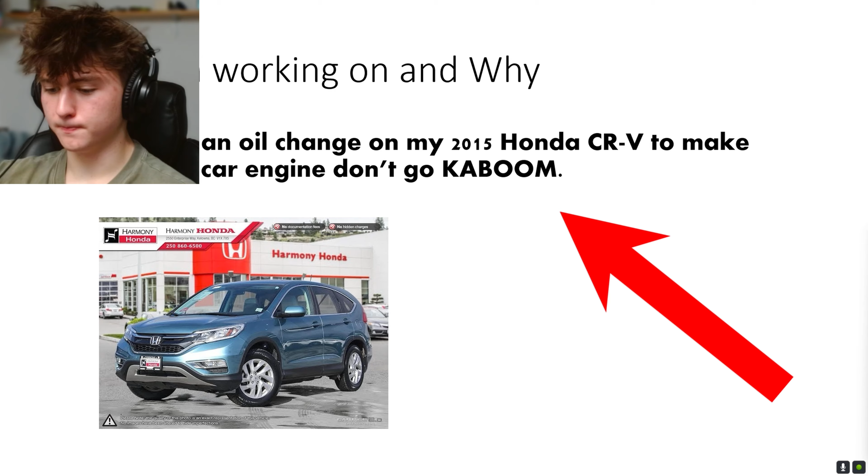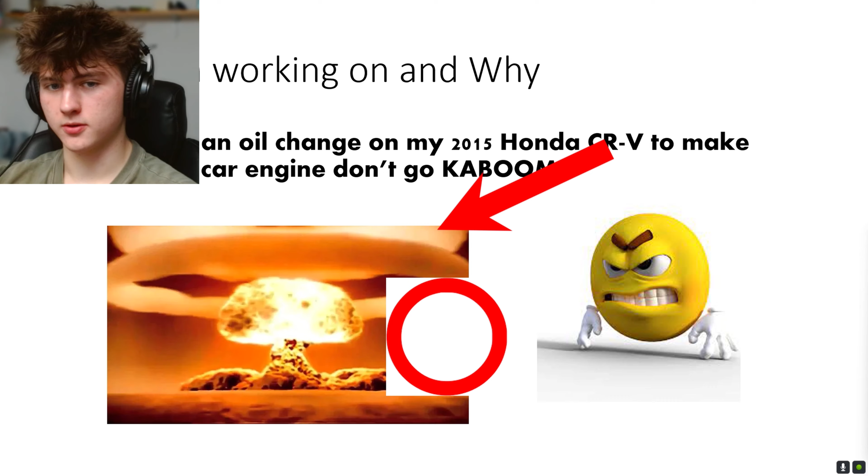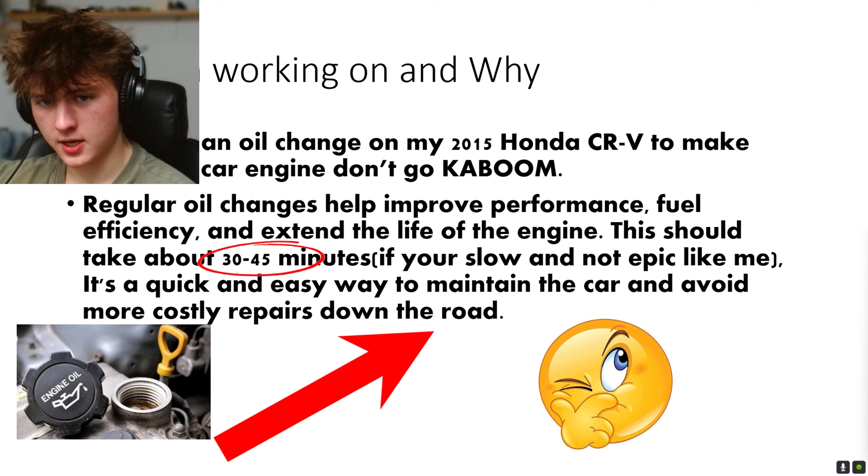Regular oil changes can help improve performance, fuel efficiency, and extend the life of the engine. This should take about 30, you can see 45 minutes if you're slow and not epic like me. It's a quick and easy way to maintain the car and avoid more costly repairs down the road.

Tools? Nah, don't need them. Just kidding.

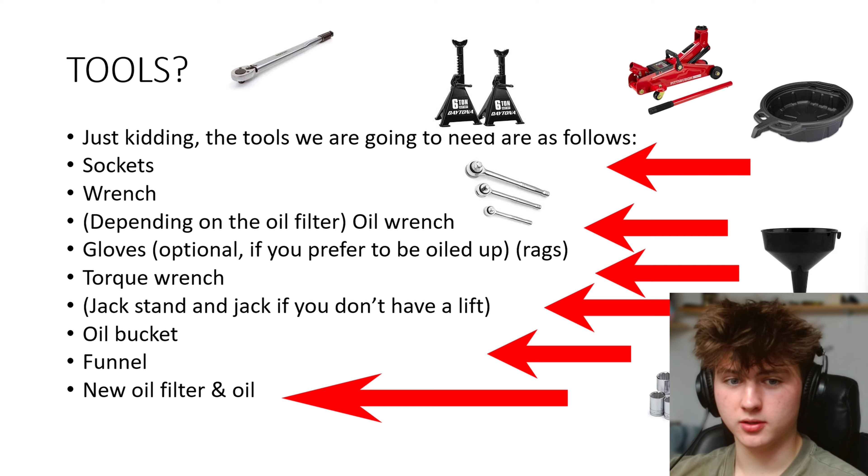Tools, as follows: sockets, socket wrenches depending on the oil filter, oil wrench, gloves (optional if you prefer to be oiled up), rags, torque wrench, jack stand, and a jack if you don't have a lift, oil bucket, funnel, and new oil filter and oil.

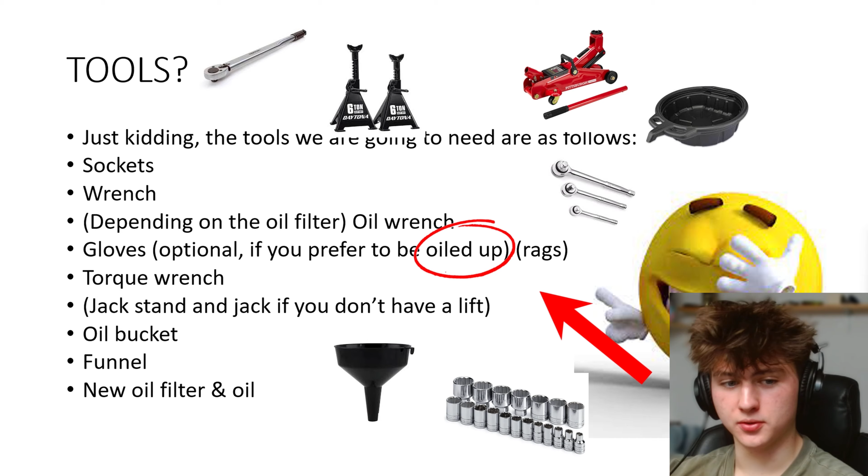Now that we have all the tools required and such, we have to lift the car. Raise that up.

Using the jack and the jack stand, you want to raise it up on the pinch welds and place the jack stand on the frame. Make sure, before you start, put on your safety glasses, so that way the car doesn't fall on your face, and the glasses will protect you from the car falling on your face.

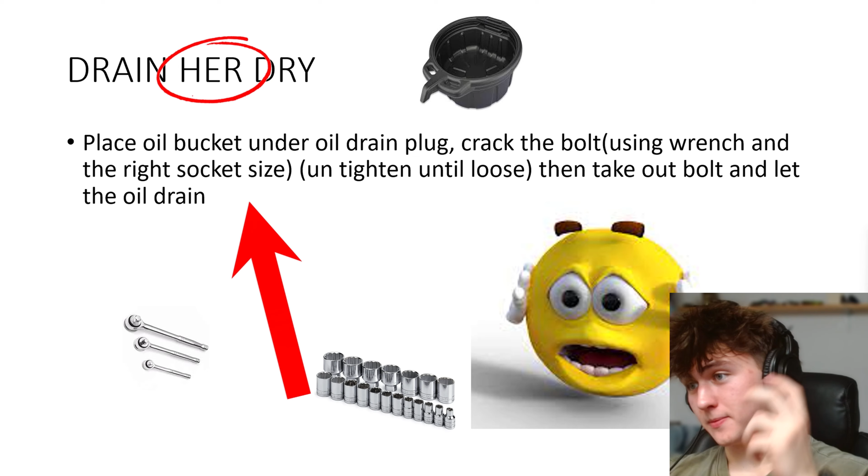Drain her dry. Place the oil bucket under the oil drain plug. Crack the bolt using the wrench and the right size socket, aka untighten it until it's loose. It'll feel like it's cracking, like you'll be going like that. Then take out the bolt and let the oil drain, as you can see, there's an example.

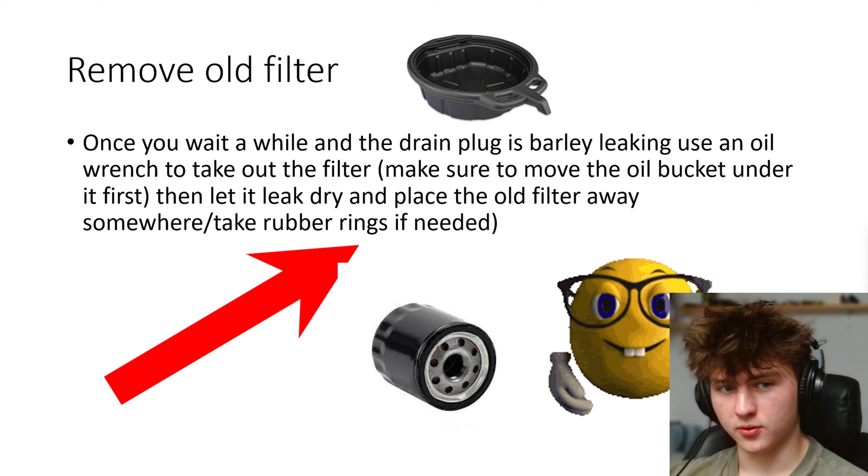Remove old oil filter. Once you wait a while and the drain plug is barely leaking, use an oil wrench to take out the filter. Make sure you move the bucket under it first. Then let it leak dry and place the old filter somewhere else. Take the rubber rings if needed.

What is the next step of the operation? What is the next step of the operation?

Install new oil filter. Take old oil rubber rings and put them on the new filter if it didn't come with them. If it did, just oil up the new ones, put them back in, and put the oil filter back once no more oil is leaking from the car. Also, this is all if you don't have that other type of oil filter.

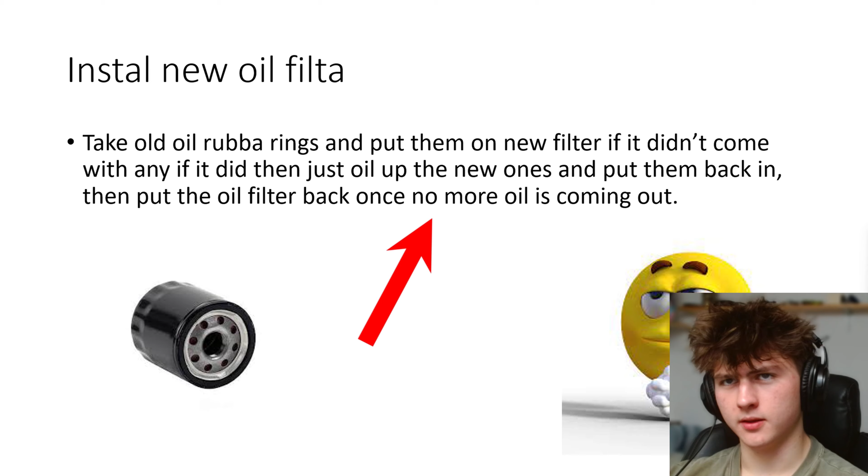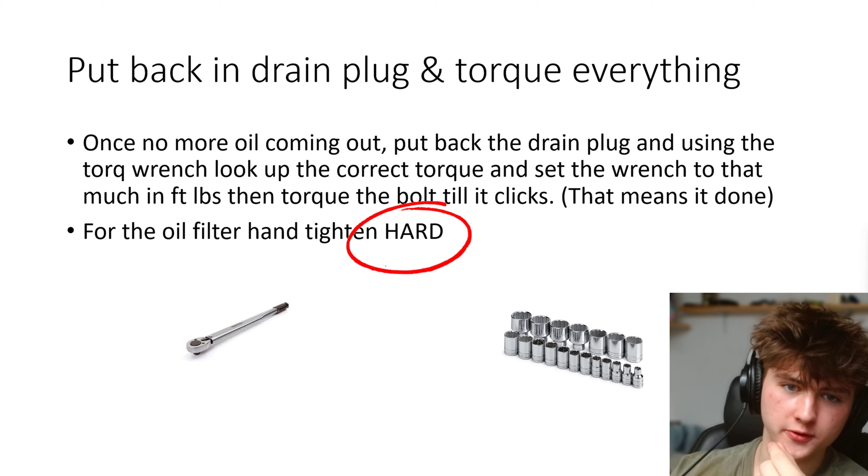Put back in the drain plug and torque everything needed. Once no more oil is coming out, put back the drain plug using the torque wrench, look up the correct torque, set the wrench to that much in foot-pounds, and torque the bolt to click. That means it's done. For the oil filter, hand tighten hard.

Lower car and add new oil. Lift the car up until the jack stand is not holding the car, take out the jack stand, lower the car. Then look up how much oil to add and what type, then do that.

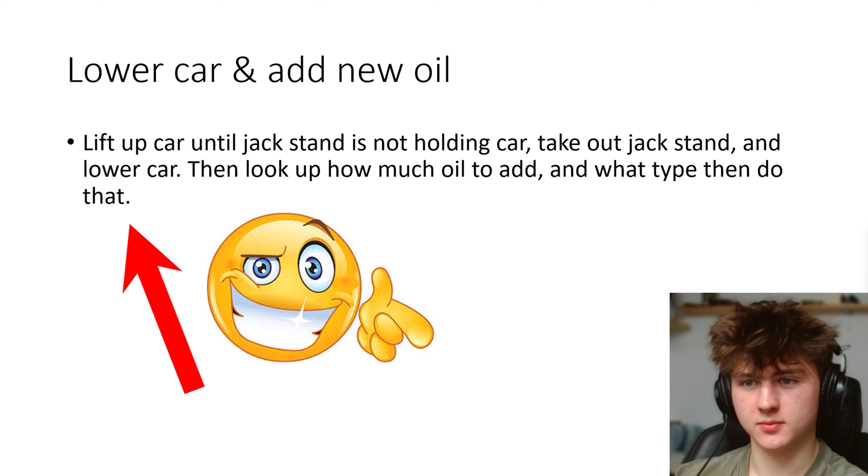Check oil level using the stick thing. Check the level of oil. If it's good, then put the cap back on and start the car, run it for like a minute, then turn it off.

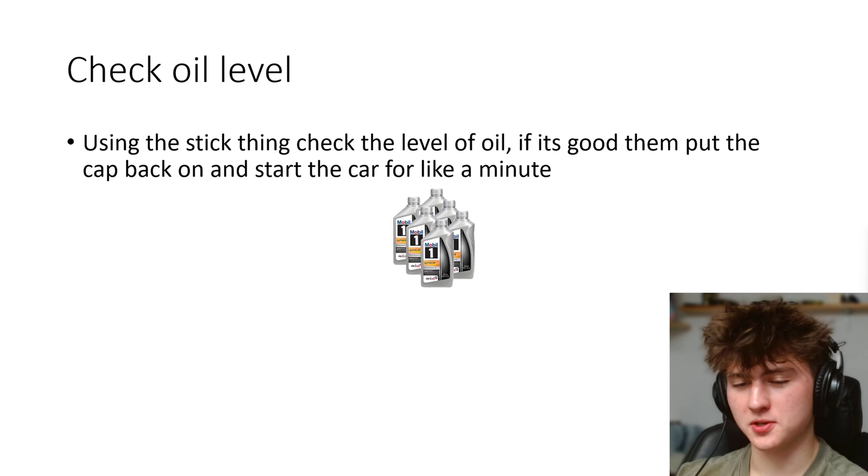Then dispose of the body. Then dispose of the body. Then dispose of the body. Then dispose of the body. I mean oil.